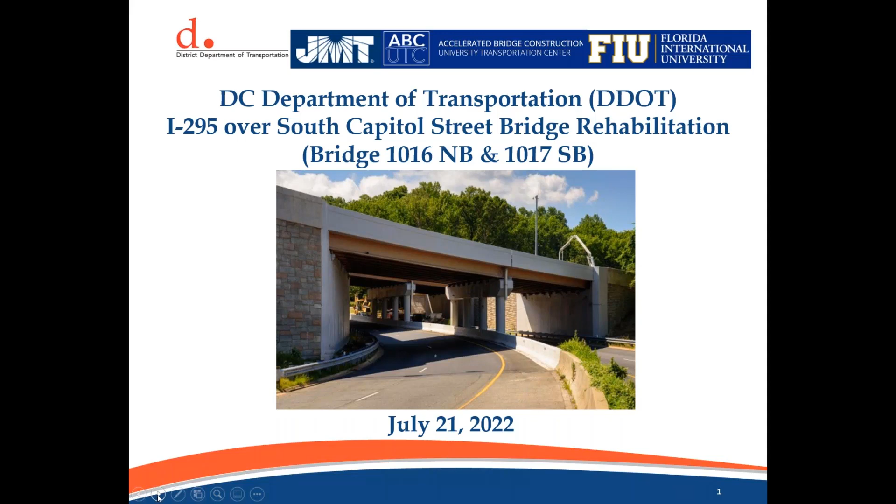Connie? Thank you, Marilu. This is Connie Eskender, DC Department of Transportation Bridge Engineer. Today we'll be discussing the I-295 over South Capitol Street Bridge Rehab project. On the agenda: introduction, introducing the teams, DDOT's experience, the I-295 over South Cap Bridge project, and a Q&A session.

For the DDOT project, we retained JMT as the engineer of record and designer. Corman was the contractor, Penn Stress was the fabricator. From the DDOT side, MNET was the project manager, and myself, bridge engineer.

As mentioned on the Federal Highway website, ABC improves site constructability, total project delivery time, material quality and product durability, and work zone safety for the traveling public and contractor's personnel. With that in mind, next slide.

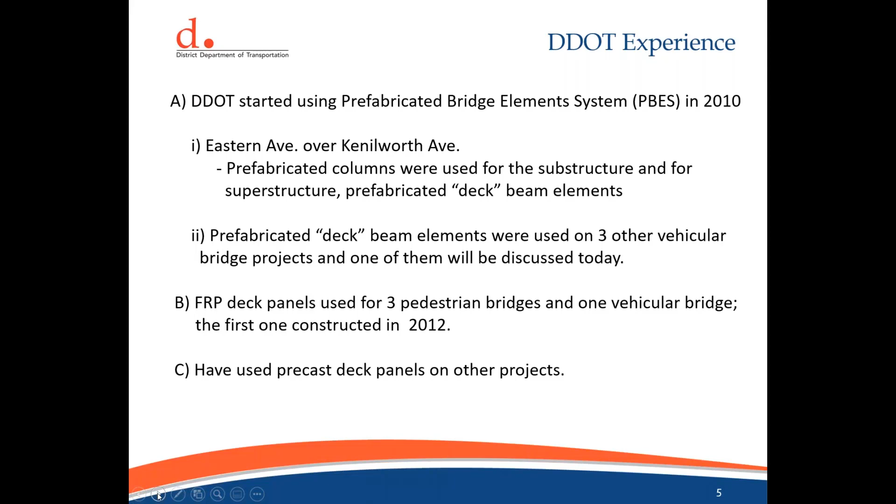DDOT has used precast deck panels on other projects like New York Avenue over the railroad and the Frederick Douglass Bridge over the Anacostia River. This picture shows some of the projects: the left one is Eastern Avenue over Anacostia Freeway, or Kenilworth Avenue; the top right is the Anacostia Riverwalk Trail FRP deck; and the lower right corner shows where we used prefabricated deck beam elements for the 16th Street Bridge over Military Road.

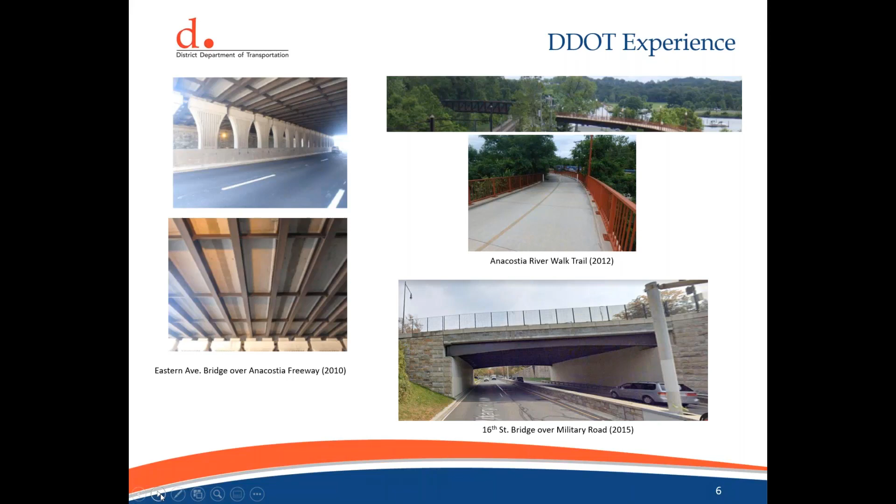I want to talk a little bit about the project location. Some of you may not be familiar with this area internationally—here's where Washington, D.C. is. The project is located on the eastern seaboard of the United States, in the capital, Washington, D.C. Within the city, it is within the 8th Ward, south of the National Mall, but near the Potomac and Anacostia rivers.

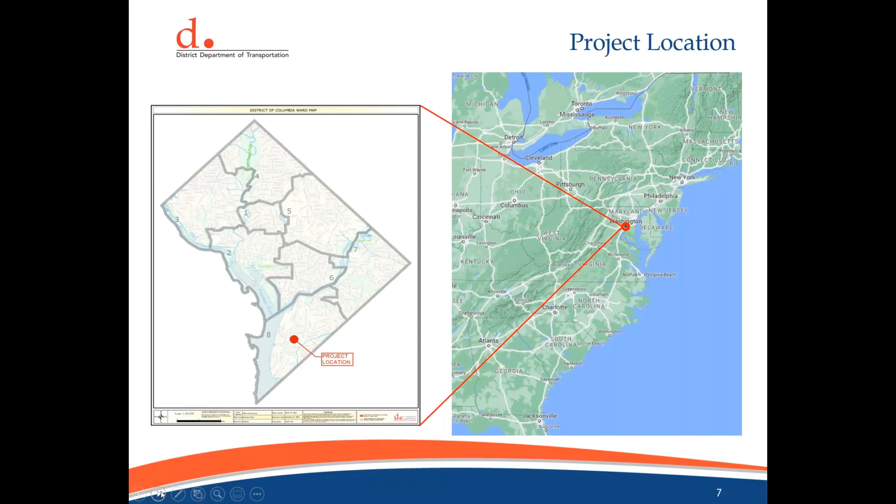As you can see in this satellite image of the project location, from the right, I-295 carries traffic from Maryland Route 295, and on the left, I-295 flows into the interchange with I-495 near the Woodrow Wilson Bridge, which leads into Virginia. South of the bridge, around Martin Luther King Jr. Avenue, it's very densely populated, and to the north of the bridge is Joint Base Anacostia.

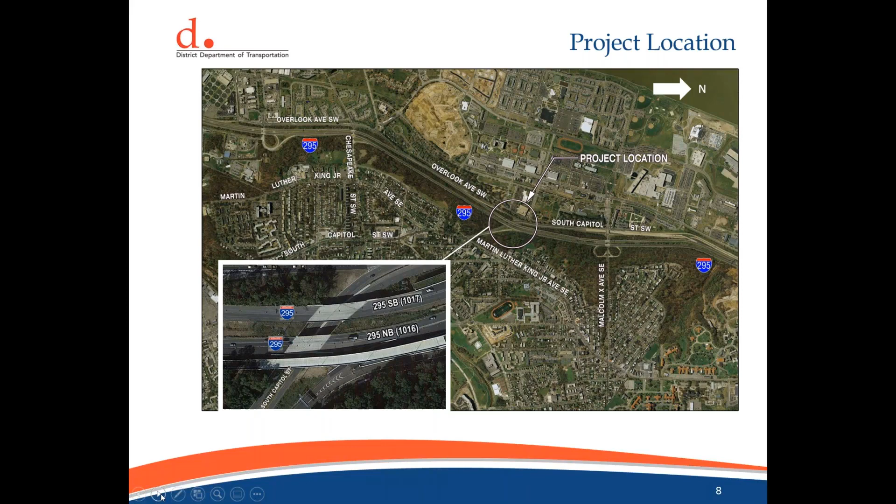The original construction consisted of a 2-span, simply supported steel girder structure—a very conventional type of construction for the era, during a period of major highway system expansion in the United States post-World War II. As you can see in the photo in the upper left, it's a 2-span structure.

The bridge ratings, in accordance with the National Bridge Inventory, were a 5 for the deck and superstructure, considered fair, and a 6 for the substructure, considered satisfactory. However, the deck had a lot of repairs done to it and looked like a quilt, with a lot of patchwork.

The typical section below shows some of the conventional construction. The beams were rolled beams, not girders, and consisted of cover plates, which are no longer used due to fatigue issues. In fact, I believe the southbound bridge was estimated to have approximately 6 years left, based on the fatigue criteria and rating.

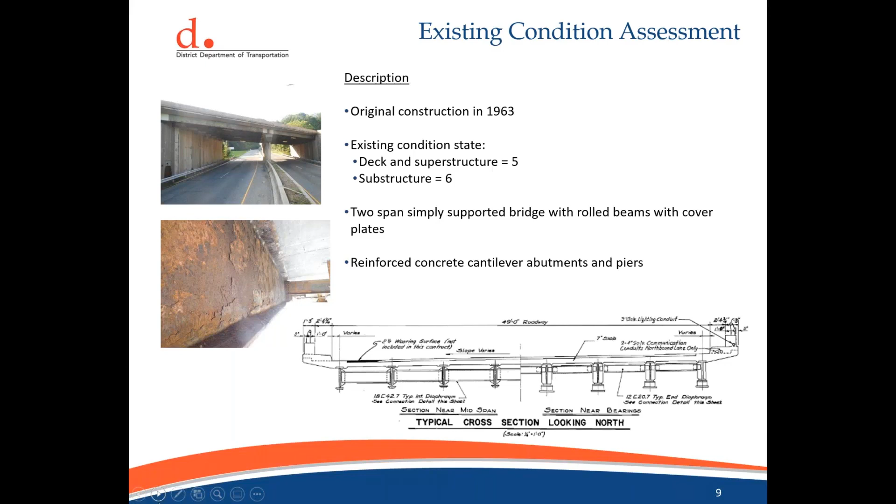The concrete abutments and piers were of the conventional type of construction for the day, consisting of joints over top of them. Being in Washington, D.C., the area is prone to snow, so de-icing salts get in there, and when the joints wear out, the salts corrode and lock up the bearings and begin to destroy the ends of the girders. You can see in the photo on the left, that's one of the girders—not near a bearing—but you can see the deterioration, flaking off rust.

So we went out and did a hands-on inspection in 2015 to corroborate the biennial inspection findings. During the inspection, we took cores of the existing deck and substructure and tested those for chlorides. The samples came back with deeper chloride penetration than recommended. We also did a petrographic analysis, which found the bond of the cement paste was compromised and the depth of carbonation was excessive.

All this leads to the LFD rating. During the rating, the existing structure rated below a 1 for LFD, which certainly wouldn't do if the structure were to be brought up to LRFD standards, which was one of the goals.

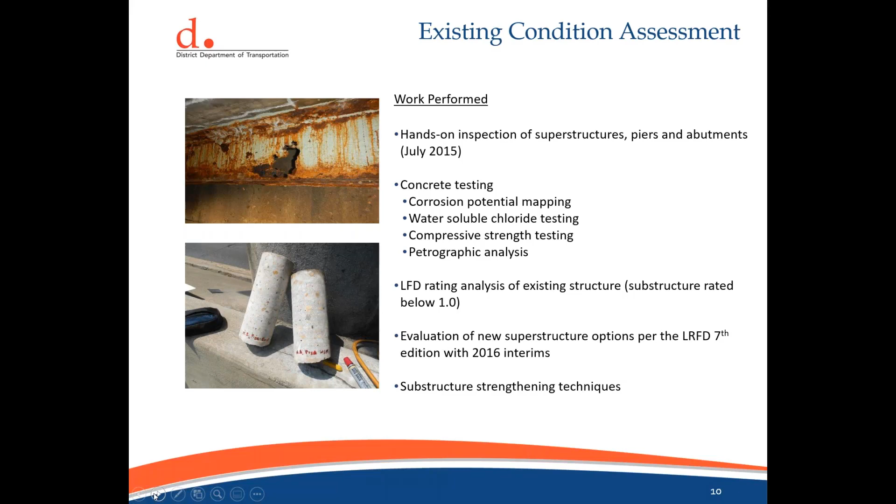Regarding substructure strength, we considered several techniques to improve the existing condition, such as carbon fiber wrapping, conventional concrete repair, and crack injection work. So our recommendations were to replace the existing superstructure and rehabilitate the substructure.

The cost to do the ABC was approximately 20% more, and the total contract price of the project was $6 million. So it's about $1.2 million additional cost to do the ABC method over conventional construction.

However, JMT did do a loss of public benefit, or user cost study, and it determined that the cost incurred by the general public, such as a longer project duration with longer commute times, increased fuel consumption, more wear and tear on vehicles, and so on, showed that the user costs were exceeding the ABC cost. They were approximately 1.5 to 1.6 million over the conventional construction, making ABC really the clear choice for this project.

So strengthening and repair of the existing substructure, again I had mentioned FRP was the way that we were going, fiber reinforced polymer, and conventional concrete repairs along with crack injection.

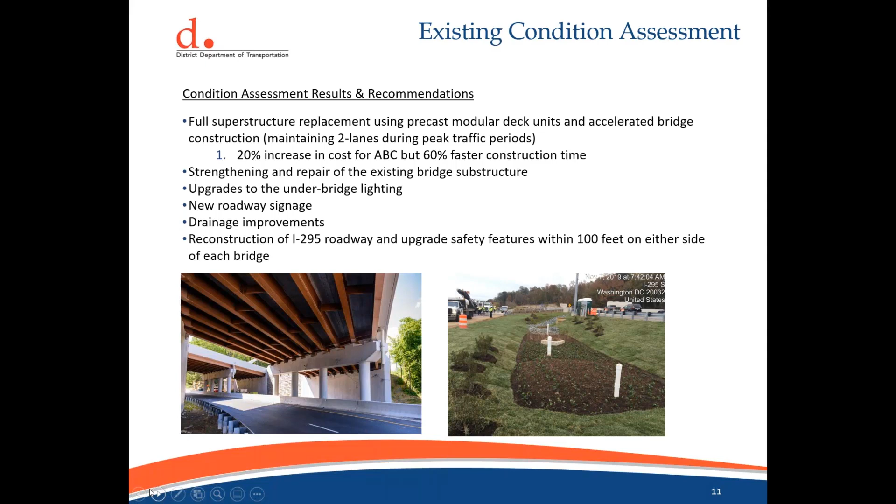The existing bridge width was really no good for two-stage construction while maintaining 11-foot lanes, so the construction was done in 3 stages.

DDOT wanted the existing stone veneer to remain for this structure, so we kept that in place. The ADT for this structure was over 40,000 in each direction per day, and the average daily truck traffic was 5% of that.

The other projects in the area made this a little complicated. The Malcolm X interchange was being constructed concurrently and provided many challenges. The coordination of construction activities was a must for the ABC project to work out.

So both projects, more so the contractor on our project, had a very conscious effort to coordinate their construction activities, and often they had to share lane closures in order to make that work. So we had good cooperation out in the field between different construction projects.

The other constraint with the project was that the skews are so substantial. The baseline of the bridge is on a radius and the roadway is on a radius, but the girders are straight. So with simple spans, we have different skew angles at the end of each girder as we go along the bridge, and the girder lengths are between 50 and 78 feet. The skew angles, again all different, varied from about 32 degrees to 46 degrees.

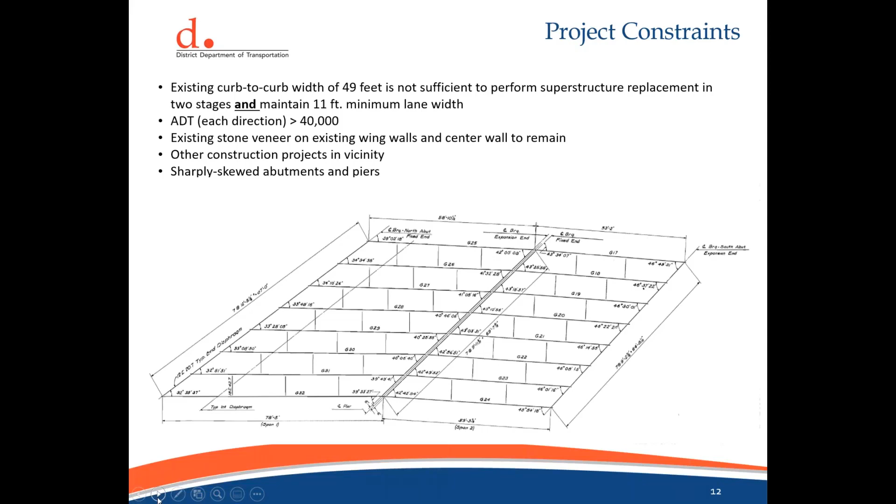Again, the goal of the project really was to eliminate the structural deficiencies, increase the durability by conventional repairs, crack repairs, and carbon fiber wrapping. Maintaining traffic without major delays and impacts was a huge issue for DDOT, because they wanted to impact their community as little as possible, but yet get the bridge done.

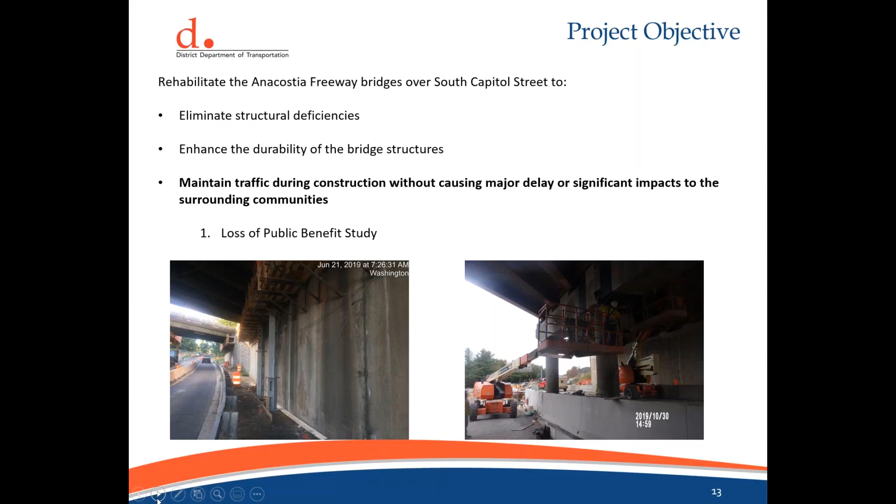Here are the typical sections of the weekend and weekday traffic. During the weekend traffic pattern, all traffic was shifted to one construction zone, with 1 lane of traffic open, and the rest of the bridge, consisting of the other 2 lanes, was under weekend construction. During weekday, there were always 2 lanes of traffic open and 1 lane under construction.

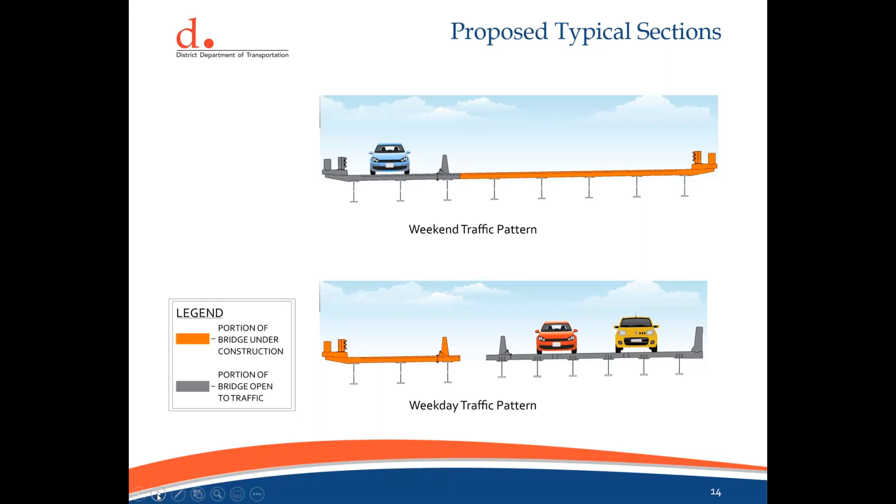So on I-295, the reduction to 1 lane over the weekend closures was limited to 4 weekends, a really tight window to try and get all of these sections in.

But the impacts to South Capitol Street were also evident. We had to close South Capitol for 2 weekends, really to get a lot of the FRP work done and some of the structural work to the abutments. Then we tried to do some off-peak work for South Capitol, closing 1 lane and restricting it to nighttime work.

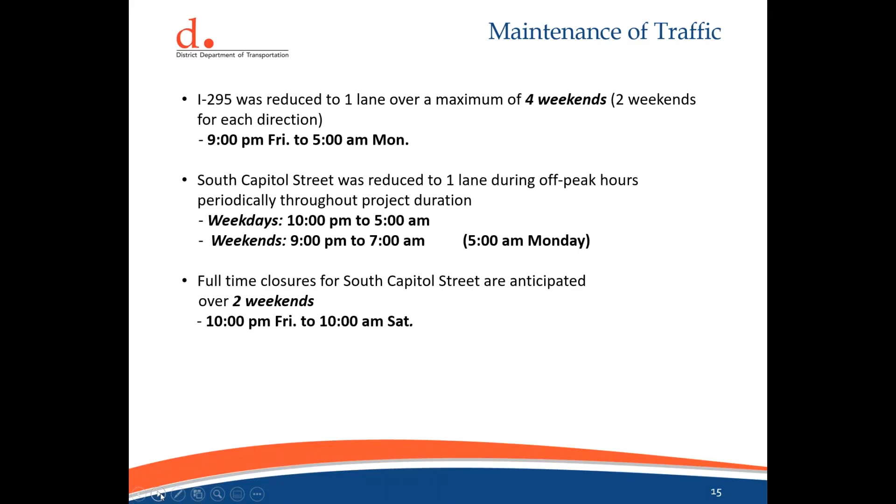Here are some of the detours we had. The first detour, the I-295 northbound detour, had an issue because we had no other choice but to go through the neighborhood in order to detour around the area. This took I-295 northbound over Overlook Avenue, then a right on Chesapeake Street, then another right onto South Capitol, and then back onto I-295.

The I-295 southbound detour was pretty straightforward. We were lucky to have a virtually no-turn option to get off and back on. You would get off on South Capitol Street, straight on Overlook Avenue, and then back onto I-295.

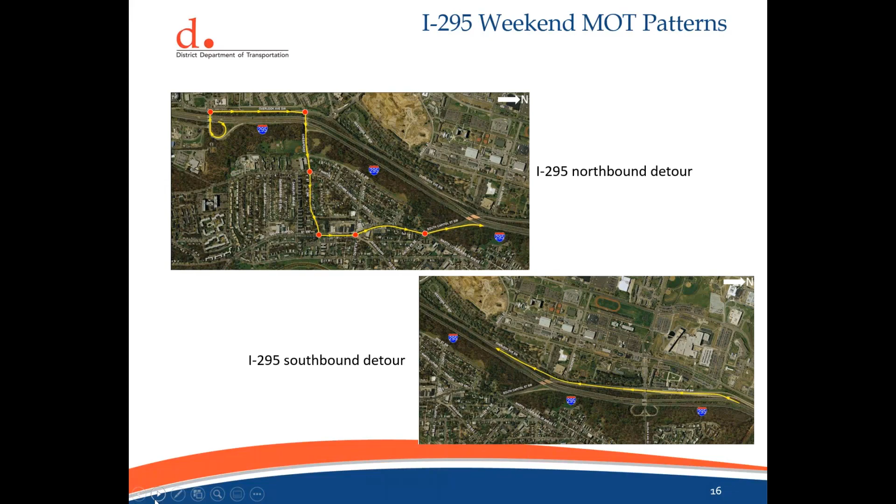So the detours on South Capitol Street were fairly similar. The South Capitol Street northbound detour allowed you to get around the project in a fairly quick fashion. You would get off onto South Capitol to I-295, exit onto Malcolm X Avenue, which was part of the other project under construction, and then a right onto South Capitol.

When South Capitol was closed, the southbound South Capitol detour was the longest, coming off of I-295 along Overlook Avenue and left onto Chesapeake Street back down into the neighborhood.

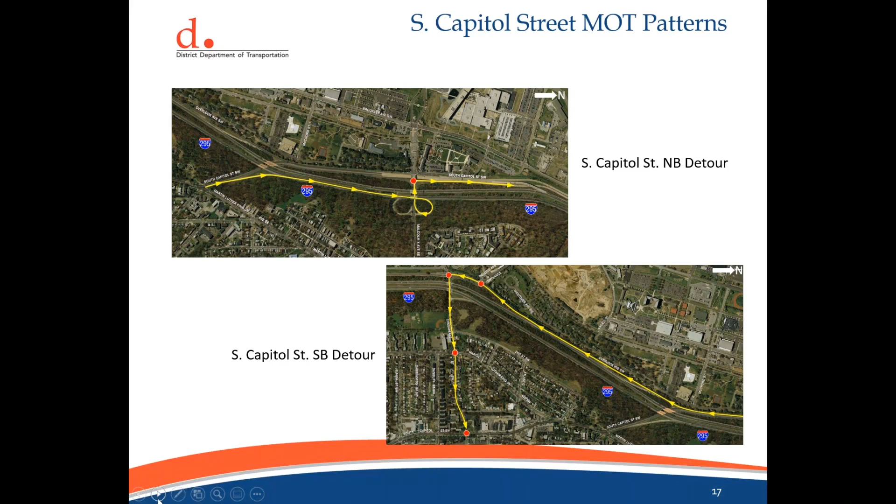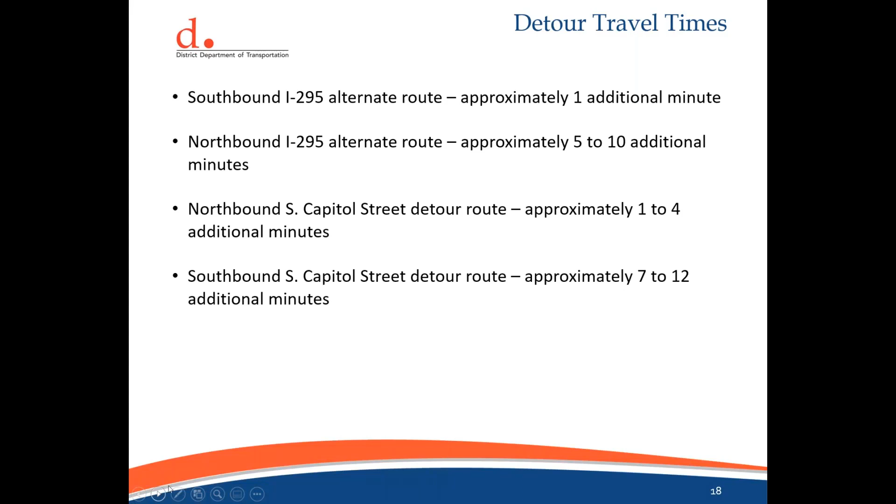So at this point, I'd like to turn the presentation over to Mr. Ben Cartwright to discuss the ABC techniques.

Thanks, John. I will be talking a little bit more about the technical details of the accelerated bridge construction that we did on this project.

Our ABC construction utilized what we called precast modular units, and these units consisted of 2 girders per unit with a cast-in-place deck. We used 5 units per span, so between both bridges, this totaled 20 individual precast units.

As John mentioned, there were heavy skews at each abutment and each pier, and they all varied. As a result, we had to show individual skews at each corner of the precast units. The contractor had the option of casting in place the exterior barrier or casting it in the fabrication plant. He ultimately elected to have it fabricated at the plant.

This presented some additional design checks for us. As the engineer of record, we had to check for overturning of the exterior unit due to the heavier barrier weight, as well as cracking due to the overturning moment. Luckily, there were no issues with this option.

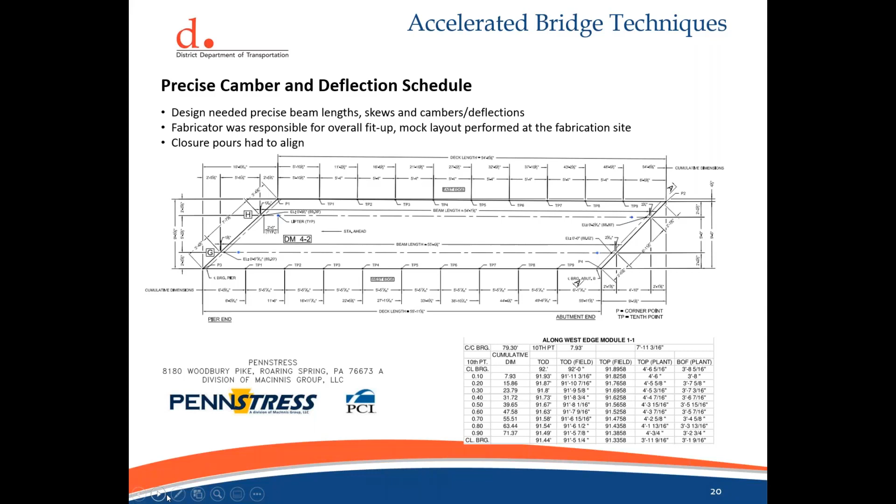The abutment fixity condition was altered from the as-built construction. Originally, the abutment consisted of a fixed abutment at abutment A and an expansion abutment at abutment B. JMT ended up proposing to use fixed bearings at each abutment, and there were several reasons that we did this.

As John had mentioned, we could incorporate a cast-in-place deck over that could be utilized to transfer drainage behind the abutment. I'll touch more on that in a future slide. Secondly, any discrepancies could be taken up at the abutment. The deck over allowed any lateral misalignment at the unit ends to be basically covered up.

All the joint rails at the pier could be aligned more perfectly because it was set at the pier first, and then discrepancies could be made up at the abutment. Lastly, any misalignment of the anchor bolts could be re-drilled and grouted as necessary at the fixed abutment. We did have a few isolated locations where the pre-drilled anchor bolt holes were not aligning, and we did have to re-drill and grout, but it wasn't an issue because the abutment was fixed.

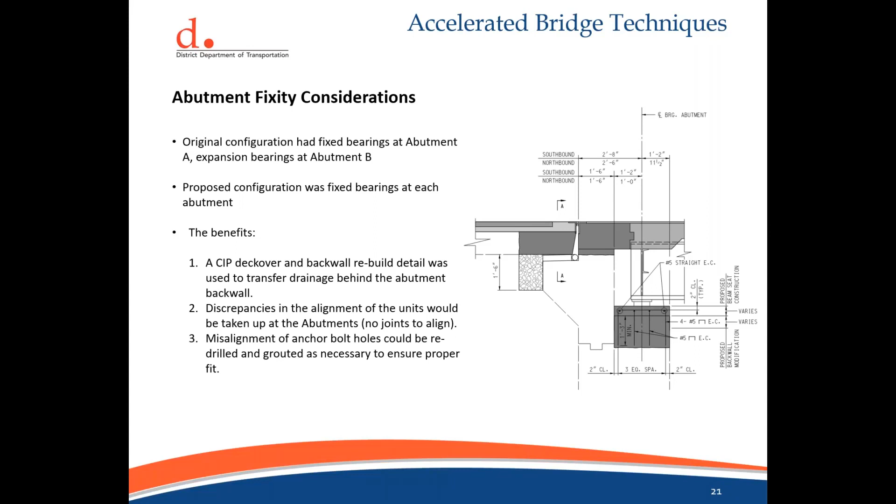The pier fixity condition was also changed from the as-built construction. Originally, piers had one line of fixed bearings and one line of expansion bearings. JMT ultimately proposed to use two lines of expansion bearings at the pier. There were several reasons for this. First and foremost, we wanted to relieve some of the thermal and longitudinal loading on the pier. As John had mentioned, the substructure rating was less than 1, so we really wanted to get the loads down. The expansion bearings at the pier allowed us to do this.

Secondly, a strip seal joint could be used for the drainage, similar to the as-built condition. We had some flexibility in installation due to the strip seal and trough material, which was a little more lenient, so it helped with the overall fit and alignment of the units across the pier. As I mentioned, the units were first set at the pier, which allowed the joint rails to more accurately line up, and all discrepancies would be taken up at the fixed abutment.

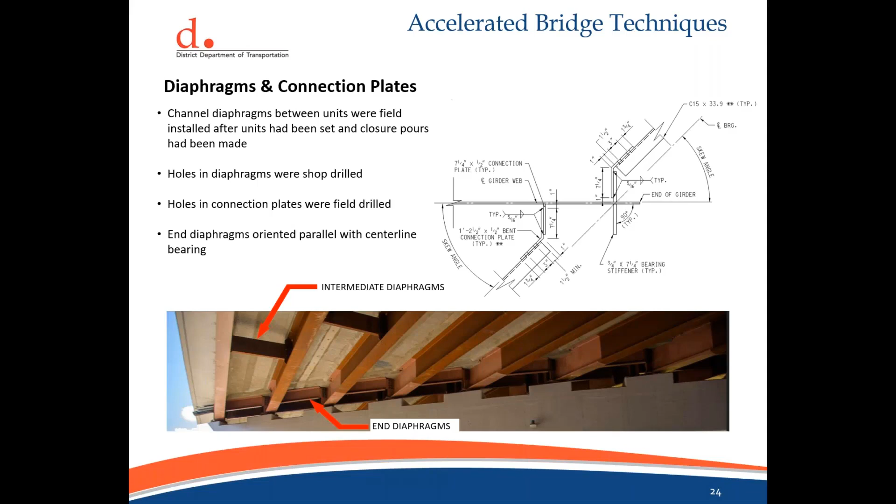The image on the bottom is a completed installation picture that shows the intermediate diaphragms, which were installed normal to the girders, and the end diaphragms, which were installed along the skew. The skew diaphragms were installed using a bent connection plate, as you can see in the detail on the right. The bent connection plate had to be fabricated to the skew of the bearing lines, so the as-built survey and comparing with the as-built skews were very important to make sure the connection plate was installed correctly and that the channel diaphragms were going to fit up correctly.

Now I'll discuss some of the drainage considerations we encountered on this project. The existing bridge had scuppers near the abutments, and the downspouts were actually cast through the abutment concrete and drained near the top of the footing. We ended up eliminating the scuppers on this bridge. Due to the inability to use a continuous beam because of the loading on the substructure, we ended up using, as John mentioned, another open joint at the pier, similar to the as-built condition.

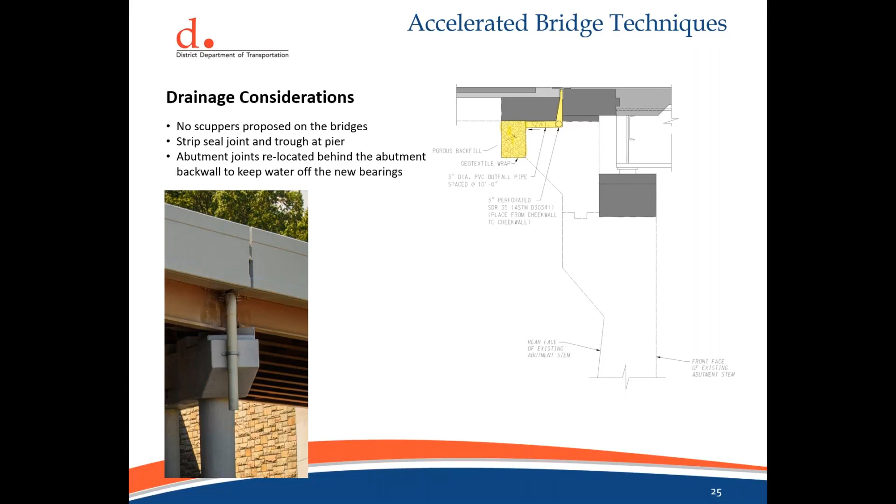We proposed the strip seal and trough as shown, with the downspout that emptied the water beneath the bridge structure. Again, the abutment joints were relocated behind the abutment back wall, which prevented water from seeping onto the abutment bearings and prolonged the life of the abutment structure. We used a 3-inch diameter perforated pipe which ran parallel with the back wall, and outfall pipes were spaced at approximately 10 feet, which carried the water to a porous backfill behind the abutment, shown in yellow shade in the image to the right.

There were also some electrical considerations on this project that we had to incorporate into our design as well. The exterior bridge parapets included both a 4-inch diameter conduit and a 2-inch diameter conduit for electrical and utility needs.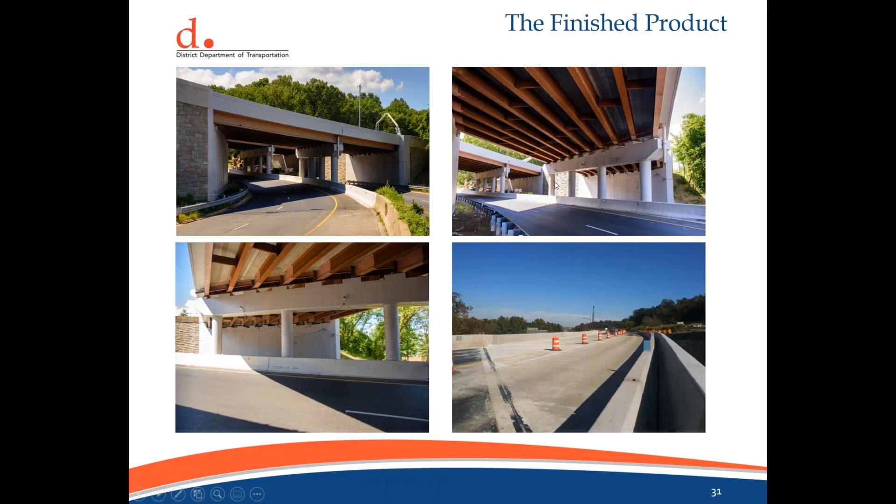And with that, I'd like to share a video on this project that our marketing group put together.

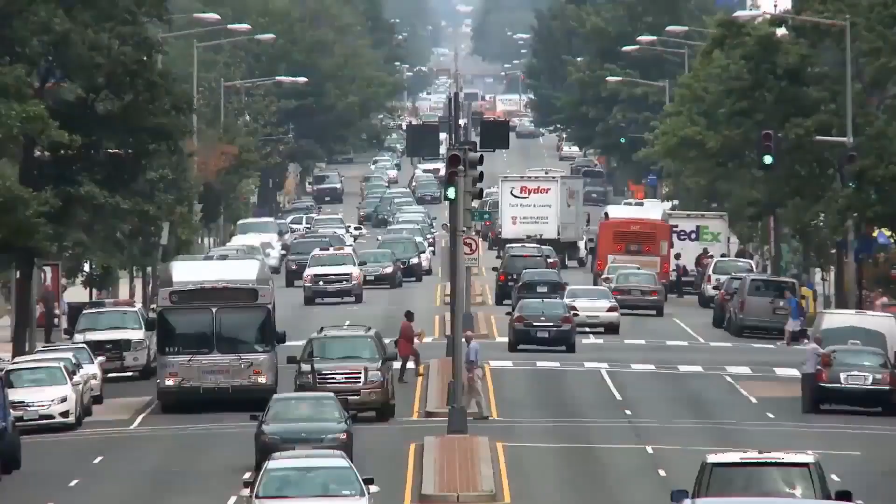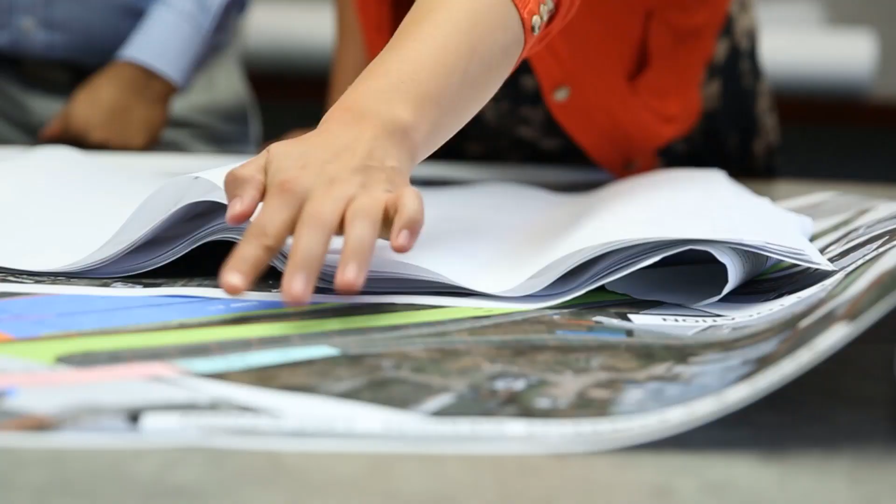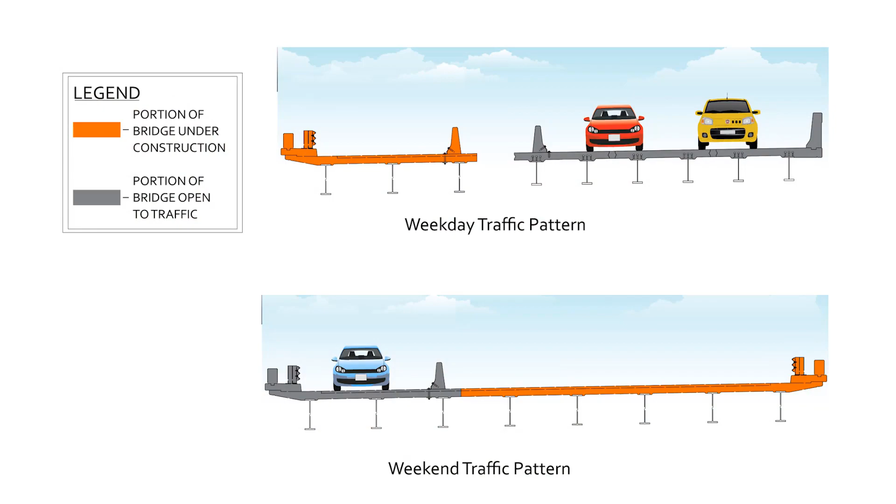This story of ABC in DC was no highway to hell. After evaluating the conditions of the bridges carrying I-295 over South Capitol Street, DDOT and JMT concluded that accelerated bridge construction, or ABC principles, presented the most practical solution. The superstructures needed replacement, but the substructures could be rehabilitated. So JMT designed the new bridge superstructures to fit within the existing site. They were constructed at the fabrication yard and delivered to the project site for installation in place. One lane at a time, the existing bridges were demolished. New bridges were brought into place, then secured by a closure pour of ultra-high performance concrete and quick-setting deck overlay. Each lane was completed within a weekend, minimizing DC commuter traffic impacts. Using ABC, this project was completed as scheduled, within 6 months, with only temporary weekend detours.

Thank you. Good night.

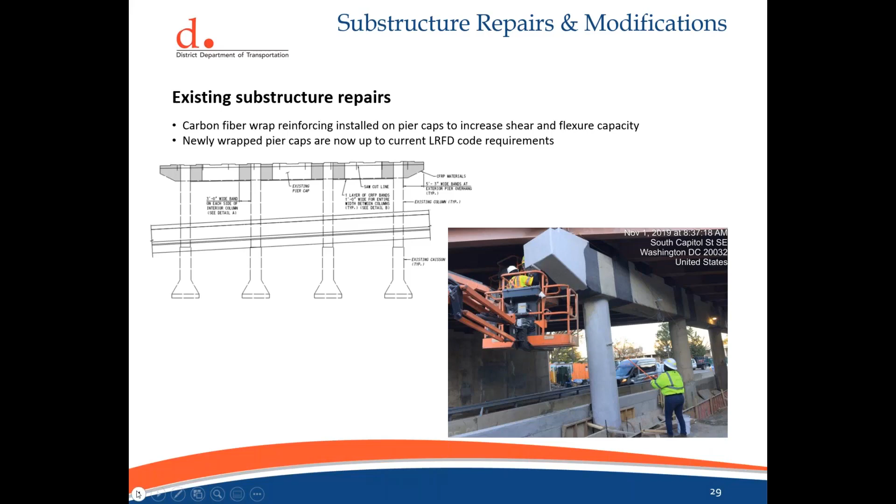Okay, next question, this one came in beforehand also. What design considerations were made to accommodate variability or tolerances in the bridge seat elevations, considering the skew? I think that's also on 28. Correct. So because we rebuilt the pedestals and the top of the cap, we were able to bring our superstructure up to the appropriate elevation that we needed. And then any other tolerances were to be made up with the LMC overlay on the deck surface.

Then on the connections between the members that you brought in, the UHPC connections, what was the design service life for those connections? So we don't have an exact design service life for the UHPC, but because it is such a stronger concrete, and the fact that we're sealing up that interface joint between the UHPC and the units so that there's no water infiltration, we really felt that the actual deck concrete of the precast units would control the service life over the actual connection of the UHPC. Ultimately, on this job, we anticipate a maximum service life of 50 years left on these existing substructure units.

Okay, here's the question that came in during the presentation. Did you include costs associated with accidents? First of all, did you do a cost benefit analysis when you were picking out what you were doing?

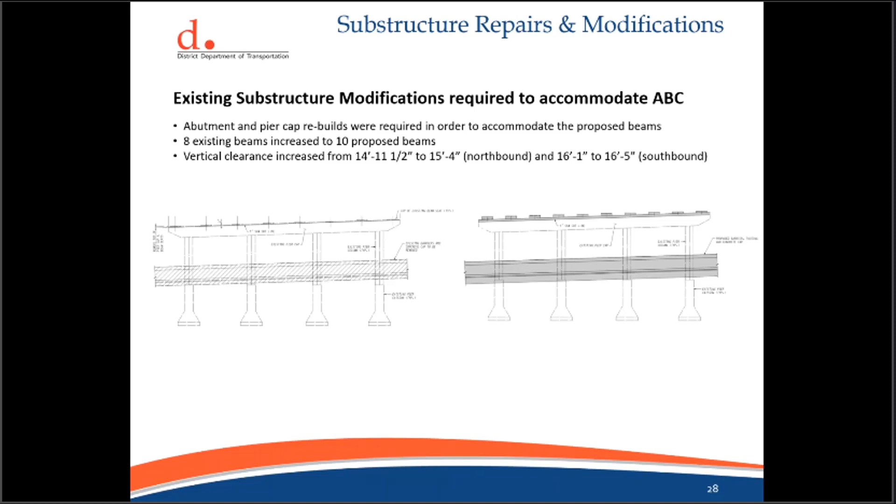And what was the beam spacing? That was the other question. So these beams here, this is hard to see, this is measured along the skew, about 7'7" on the left side, 6'11" on the right. As I mentioned, each beam had a different length and a different skew angle, so there was no real consistency between these. For the normal spacing, I would have to double check our framing plan. I don't have that in front of me.

That's fine, I was just wondering. That's what they were looking at, the length, rough length and width. That's what they were looking for, I think. Okay.

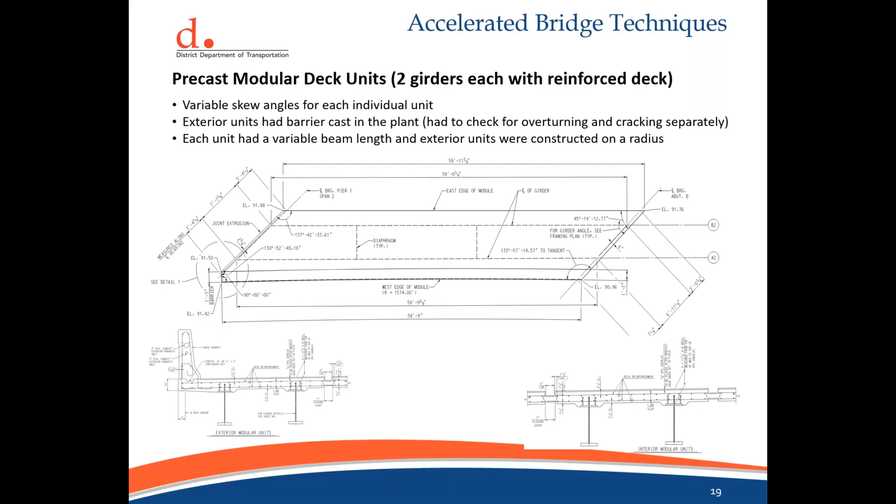Then I think that gets most of our design questions. We do have a question about the joint. Can you go to your joint detail? The question was, usually with the strip seal, they think of it as not having the trough underneath - it just usually has a seal that will drain off the bridge at the ends of the strip seal. But the question was, maybe did you add the trough as an extra protection to the strip seal? I don't necessarily think it was for extra protection. That's a good question, I don't recall the means behind the trough when we were putting this design together. I do think there was a trough in the as-built condition, and we tried to replicate what was already done. There already was an existing downspout, so we had just kind of done the same thing, since we weren't changing the joint configuration or anything like that.

Okay, let's look at some construction questions that came in - these are pre-webinar questions. The first one was, could you discuss the closure pour details, the end diaphragm details, and the erection constructability issues for the project? That's pretty big, but you covered that in a bunch of your slides. I don't know if you wanted to add anything to that.

I think I really did touch on these in pretty good detail throughout the presentation. The closure pour, the anchor bolts - one construction issue I didn't really mention, which goes along with the deck over detail, was that if these abutments weren't fixed, if there was an expansion abutment, what we found was that when setting these units on such a sharp skew, when you looked down the line, you wouldn't see such a uniform joint line like you did at the pier, just the way these units were set. So we were pretty fortunate we were able to use that deck over detail, but that could be a constructability issue if you had two expansion bearings at each end, where your joint angles weren't equally lining up.

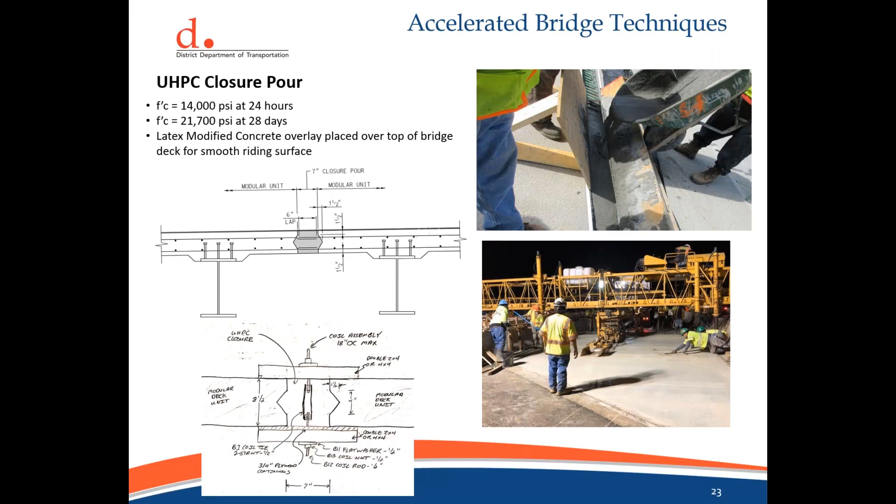The question that came in beforehand about could you discuss the joint details - that's the detail between the sections, and I think you covered that. I don't know if you wanted to elaborate on that any. Yeah, I think I pretty much covered this.

The only other thing I can mention is that the joint rails had to be cast slightly higher than the top of the modular unit because we had to account for the overlay ultimately. So what we had to do during the critical weekend was put down a layer of asphalt and actually pave up to this joint rail to protect it until the next stage could be completed with the overlay. But other than that, I'm pretty sure I covered how these things were installed.

And what were the challenges during the closure pour of the UHPC? That's a pre-webinar question. As I mentioned, the only issue we really found was the rebar laps. I think the 6-inch minimum lap was obtained from an FHWA study. And as I mentioned, we did have to provide some supplemental bars in some locations to maintain that lap. But other than that, the closure pour was pretty straightforward.

One that came in beforehand was, what was the biggest challenge for the contractor to overcome in this project? I was wondering if it was traffic or the crazy geometry with all the angles and beams being different. No, you got both of them. Definitely the MOT, the coordination with the Malcolm X job. As John had mentioned, it was really critical, especially during our critical weekend schedule, to make sure that our MOT wasn't going to interfere with theirs. And just from a construction management standpoint, it was really challenging. Then on top of that, you have these heavily skewed units that you really need to ensure you were going to be able to get in place within the time frame over the weekends, or you were going to be hit with that disincentive.

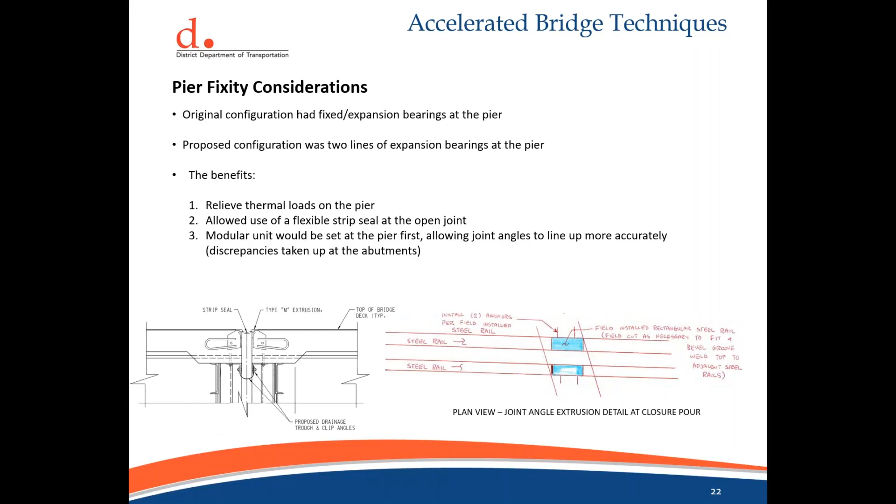The final question I have on construction beforehand was what were the lessons learned? You covered that on slide 30, I think that was pretty good. You may want to add anything - is there anything you want to comment on that? No, I had to think pretty hard about what to mention here, but these were the big ones. I think these were the ones that really hit home for us that I wanted to relay to everybody.

Okay, I've got a couple more questions. There's been a bunch more that have come in, and we'll get to those in just a second. But the first one, this is involving cost, and this was a pre-webinar question: could you discuss the effects of skew on the cost of the project?

Yeah, so as I mentioned, each individual unit had to be detailed separately, so we had to do an individual plan sheet for each of the 20 units. And I don't have the particular change in cost from the fabricator, but as you can imagine, he had to adjust everything per unit as it was fabricated. So I'm sure there were some increased costs associated with that, but I unfortunately don't have the change in cost versus a conventional or cookie cutter type modular unit construction.

Here's a question that came in during your presentation. You mentioned the disincentive or penalty for going over time, but was there an incentive payment to the contractor if he finished early?

No, based on the construction activities, I really think he needed every minute to get everything done. There was no incentive to finish early. It's really neat that he got done in the time we gave him, that's pretty good. It's really a difficult project.